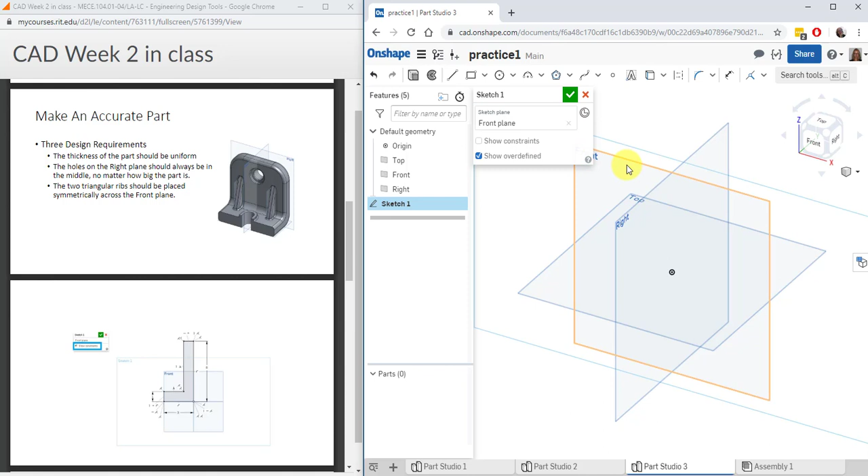Okay, so we're going to start by creating this sketch on the front plane. First, I'm going to add another part studio for this bracket. So we're going to go ahead and create a sketch on the front plane. And we're going to try to capture all of these constraints to get this dimension of 1, 3, and 5 to drive this bracket size. Notice that I've got a little origin down here in the bottom right corner, and we're going to keep that. Here we go.

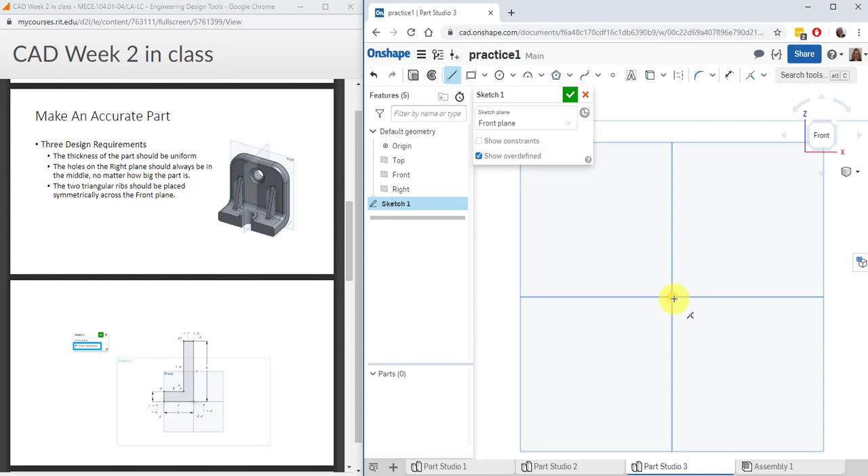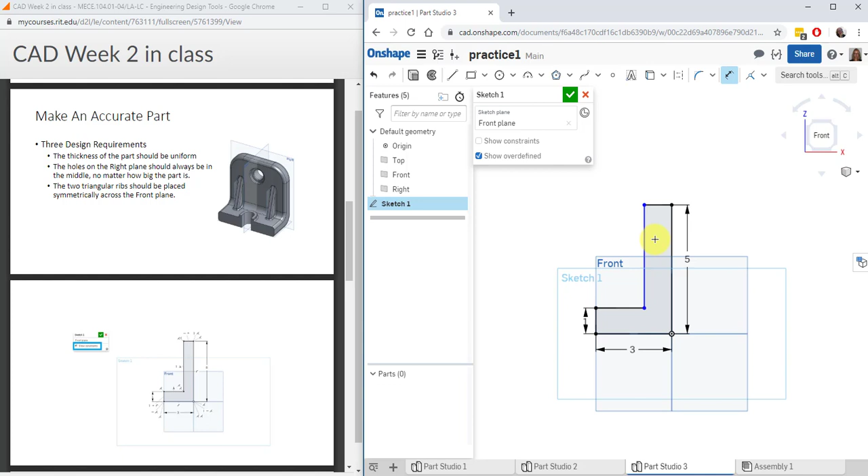Okay. Looks good. I still see a blue area here, and I need to figure out what it is that's making that want to change. It probably doesn't know the thickness, so I can use an equal sign to make the top and the side the same thickness, and there I've maintained the thickness of the part. It should always be uniform. Constraints are shown. Everything looks good. Green check mark.

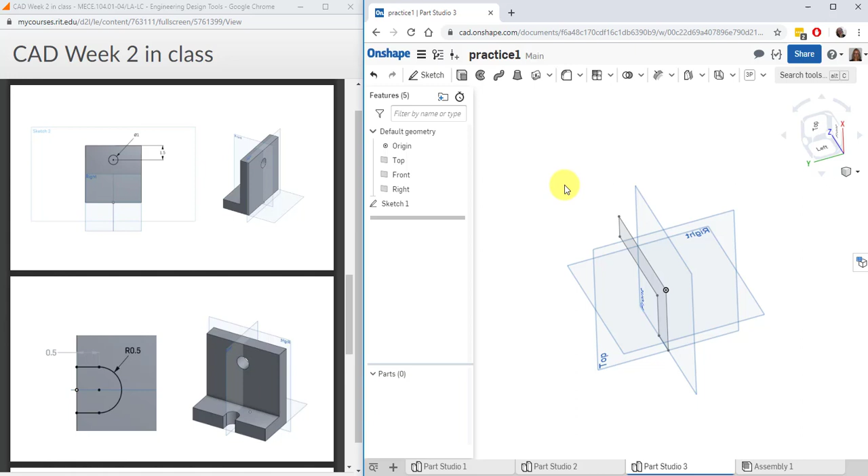So we'll go ahead and extrude that. We're going to extrude that symmetrically. So I'm going to change the depth of my extrude from blind to symmetric and give it a thickness of 5.

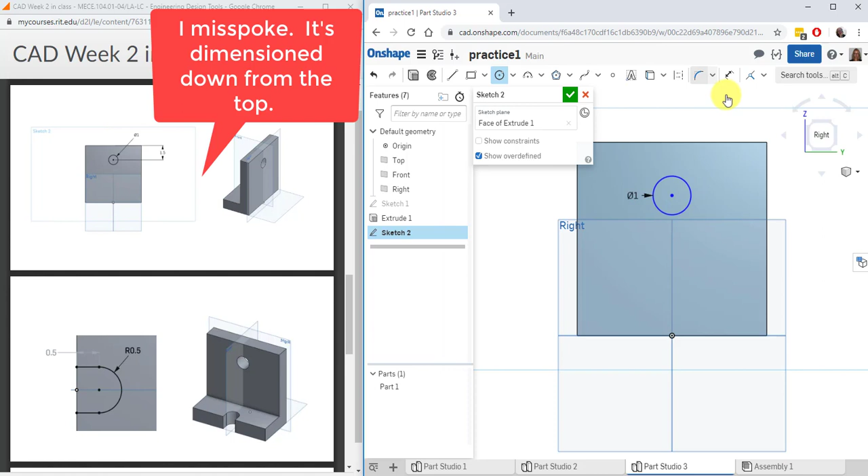We'll go ahead and add this hole. So I'm going to place that hole on this back surface here. And when I place this hole, I want to make sure that I'm picking up that same origin that I used to create the sketch. So I grab that little construction line, place my hole, give it a size of 1, and notice it's not dimensioned up from the bottom, but rather it's dimensioned down from the top. And that's indicating to me that no matter how tall this part is, the more critical component is where it's located relative to the top rather than where it is located relative to the bottom. That's the more critical component here.

Finish my sketch. And with that sketch selected, I can remove material. I don't want to add material, I want to remove it. So I'm going to flip this arrow, select the remove material icon. Okay. And it looks okay, and it would probably be fine, but really I don't want to give it a depth dimension. I want it to go all the way through no matter what. We can either use through all or up to next. Either of those would work. I'll use through all in this case.

Alright, next we're going to add this slot here. So I go ahead and create a sketch on that step. I'm going to go ahead and use the circle tool. Again, I want to get it in the middle of this object. And then from here I'll create a rectangle. The rectangle is going to catch onto the edge of the circle, both sides, and stick to the face of the part.

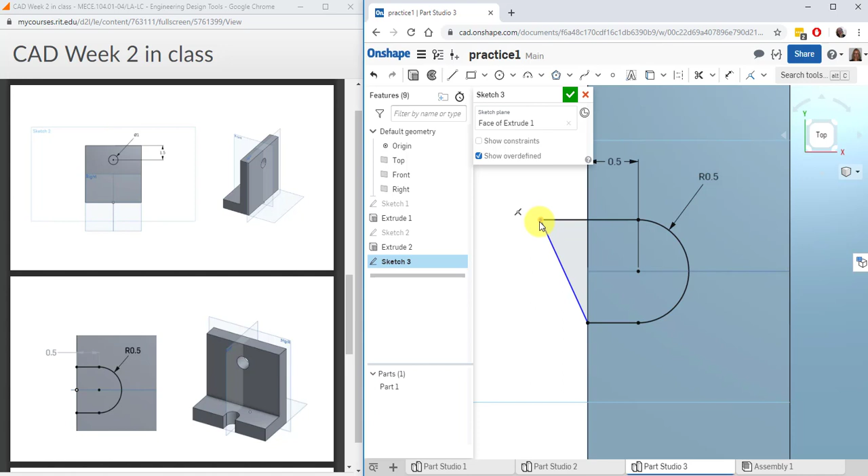We're pretty good. We still have some blue lines over here. Let's see why that is. If I grab my line, see how that point was blue? I can still move it. So I'm going to go ahead and use the coincident constraint again to stick this point onto that line. So yours might have had different things that made it stick or not.

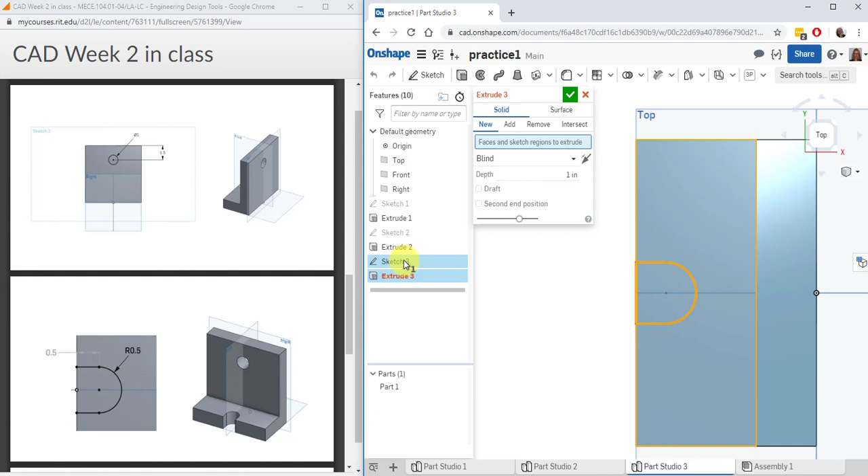We do want the circle to be on this line with a radius of 0.5, a distance of 0.5, and adjacent to this edge here. Okay. Again, remove. Okay. Removing the material, going towards the part, and going through all. Looking pretty good.

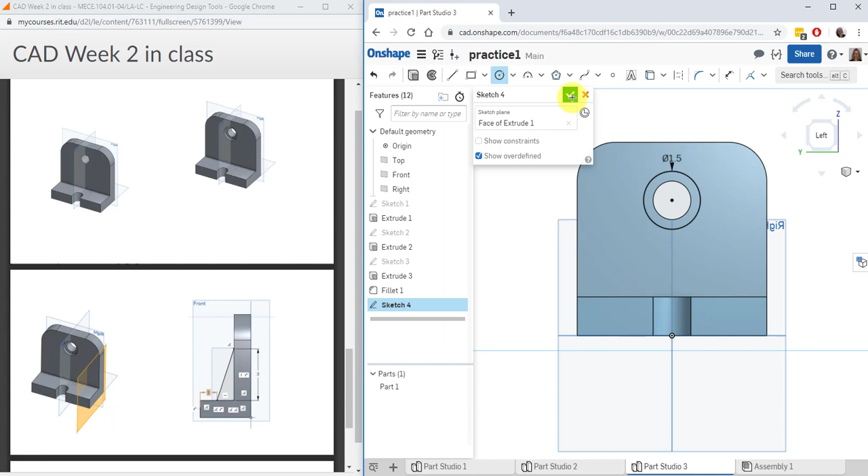Let's see here. We're going to add on some corners up here. Give those a radius of 1. And we're going to increase the diameter, or give a counterbore around the hole. Let's extrude that. We can just click on this little circle face here. I'm going to go the other way, but not too deep. 0.25. Remove. Looks great.

Alright, let's go ahead and add in these ribs. However, in order to add these ribs in, we need to have a new plane that's created. So the plane tool we can find from the drop down of this offset surface tool. The plane tool is here. And I'm going to create a plane that's offset from my front plane. We're going to offset it, say 2. Oh, that doesn't look quite right. Let's try 1.5. There we go.

On that new plane that we created, we're going to go ahead and create a sketch. And that sketch is going to show us this cross section for the rib. So we have to add some constraints and some dimensions here. So we'll make the bottom of the line coincident to the top of the flange, and we'll make the side of this angled line coincident to the inside of the bracket.

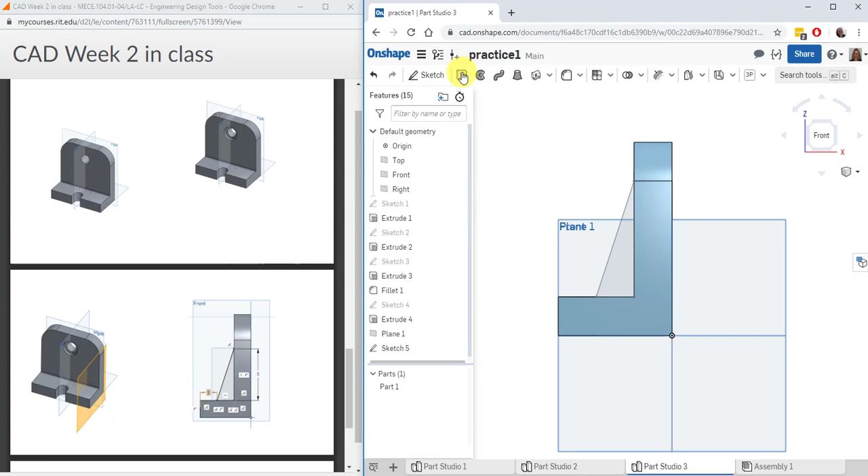Let's finish up the line tool. Come all the way down to the bottom here. Notice how it let me go way too far. I'm going to go ahead and make that horizontal. Perfect. Finish that sketch, and I can create an extrude that's symmetric and with a thickness of 0.5. We do want it to be added to the existing object.

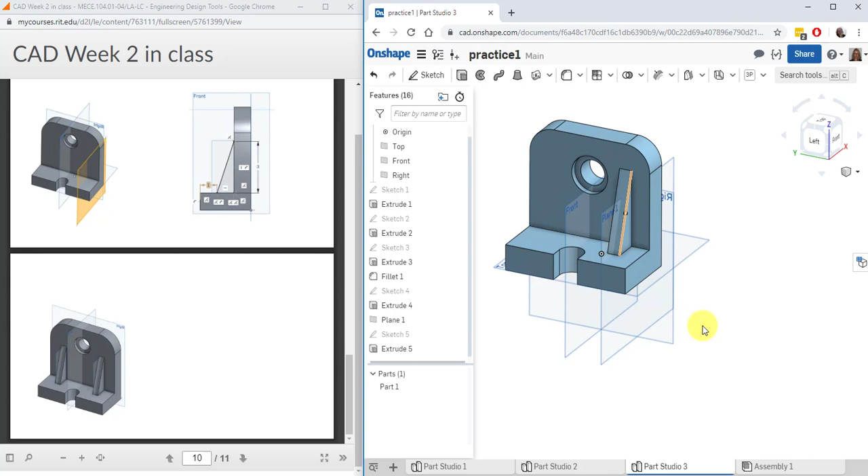And last, we can take that object, that extrude, and we'll create a mirror. We're going to switch it to a feature mirror. Select extrude 5 is the feature to mirror, and the mirror plane is the front plane. And that completes our designing with constraints practice part.